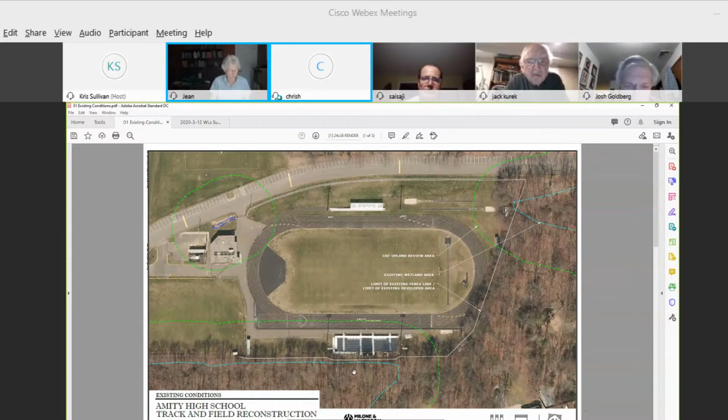The planning for this project has been in the works for the last couple of years. About 6 or 7 months ago, the towns that encompass the school's body — Woodbridge, Bethany, Orange — had a townwide referendum allowing this project to move forward. The main need arises from the existing track and field facilities being on the older side, I believe in the 20 to 30 year range.

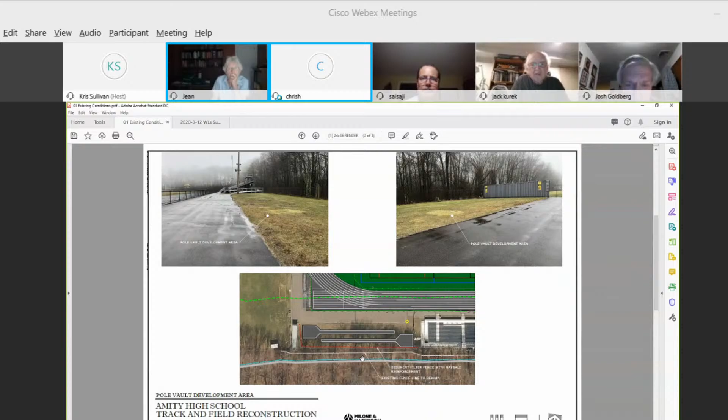They have a very outdated track. The field itself is usually very wet, and once football players get on it, it deteriorates very rapidly and really limits the ability of the site to be used.

Another crucial part for this facility to operate the way the school needs is to maximize the available area within the track itself. That's why we'll be taking the pole vault areas currently located on the eastern side of the field and moving them down to the southwestern portion.

You'll see that there are 2 pole vaults proposed here. It's possible we might only do 1, but in this instance the track coach was looking to get the ability to jump in both directions, since wind going one way or the other affects the jumpers.

The reason we're putting it here and not anywhere else on site is because to the east is all wooded, to the south we can't go because that's off the property and wetlands, to the west is already a field with the concession building, and to the north is too steep and there's a drive aisle there. So this is really the best location we can put this.

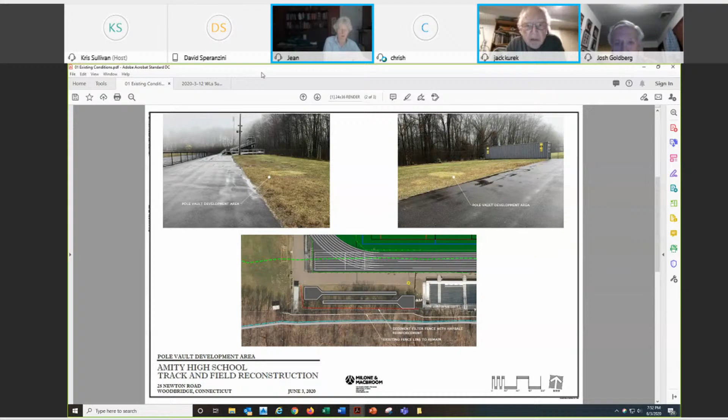Okay, that's passed. And Bob, I'll pass the meeting back to you. Thank you very much. Thanks, everybody.

Okay, we might keep moving along then. Next on the agenda, 57 Park Lane, an application for development of a solar park, a solar farm.

Chris? Yeah, I'm sorry, I think the microphone was cutting in and out. Are you prepared for me to just give a brief presentation on the project? I'm ready to listen, I don't know about everybody else. Yeah, I'm all set. I can see you.

Okay, you can bring something up on a screen if you want. Yeah, I guess let's see. Share content. I apologize, I'm not... Otherwise, everybody has all their plans in front of them, I hope. Nope, I just figured it out here. My Mac made me give a couple permissions here. Can everyone see my screen now? Yes, I think so. Okay, great.

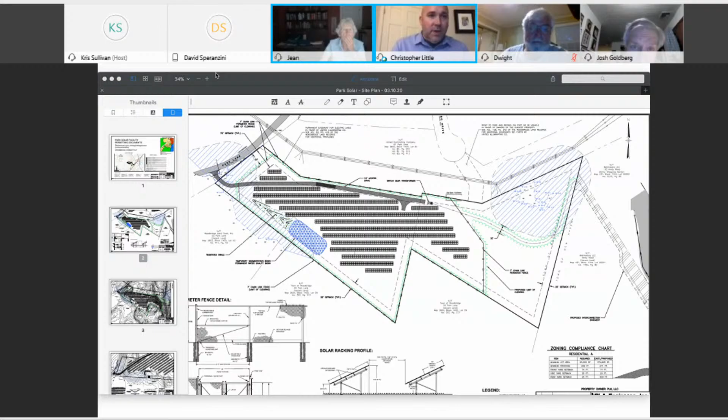This driveway will be constructed out of crushed aggregate. It will not be a bituminous surface, so there actually won't be any asphalt or concrete in the project other than for some of the equipment pads.

In terms of how we're actually going to connect to the grid, we are not proposing to interconnect to United Illuminating's distribution system on Park Lane. We're actually going to be interconnecting further to the east via an underground medium voltage circuit, and you can see that delineated here. It may be difficult to see at the resolution I have, but you might be able to see it better on your plans. It's going to traverse up through the buffer.

This will be trenched and backfilled. Once it's backfilled, there won't be any ongoing impacts. And then it's going to turn downward and interconnect down on the shopping center, the Amity Shopping Center property. The reason for this is the shopping owner property also owns this property in between, and they wanted us to try to stay along the edges of their property rather than bisect it. So I wanted to point out that's the reason for why we're proposing to send this circuit this long.

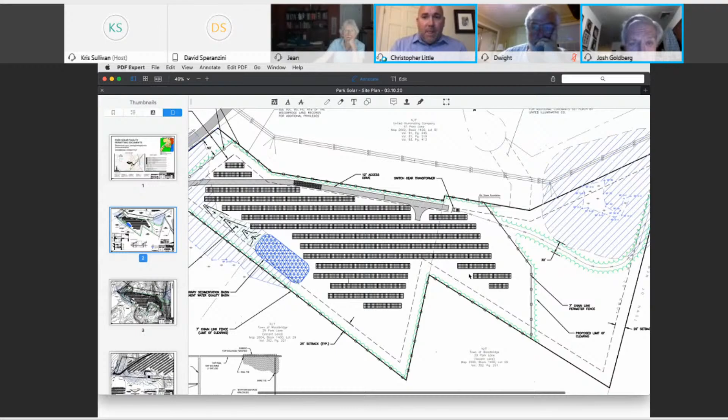Really somewhat unnecessary distance, but it's to appease the property owner so that they will grant us an easement. How much loss, just out of curiosity, do you get running that distance versus the more direct route?

It depends - since this will be an AC circuit, not DC, we can typically avoid massive losses by sizing the cable large enough, but it'll be a big cable. I don't know exactly what the losses will be, but they'd probably be somewhere in the neighborhood of 1% of the facility's generation, is my guess.

A few other details that you can see on the site plan. We will surround the site with a chain link fence. I did note on the engineer's comments that there were some inconsistencies between what we had noted on the plans versus the narrative. It would be a 7-foot chain link fence without any type of rampart on top. Inside the chain link fence, everything would be cleared, and the surface will be maintained with natural vegetation. Any sloped areas will be graded and placed with 4 inches of topsoil, and then either riprap installed or some type of matting to prevent any erosion runoff.

In terms of the wetland impacts, there are no direct wetland impacts. There are a few areas - you can see the blue hashed areas, the 100-foot buffer zone. The area inside that would be the wetlands. There are some minor areas here that we're kind of encroaching into those buffer areas, as well as with the detention basin being proposed, but nothing directly impacting the wetlands. On the east side also, we are proposing to install the underground circuit within a portion of the 100-foot setbacks.

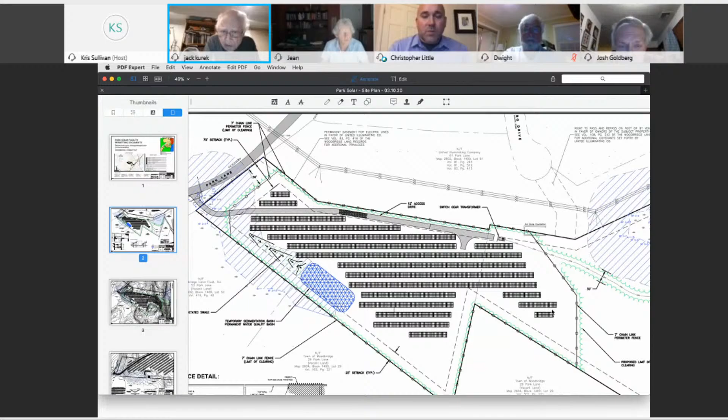I have one question about the retention basin. Is that because of the slope of the land that's where the water is flowing to, or is this in there for some other purpose of drainage?

I'll let Rodney answer that. I know the answer, but I think he'll speak more eloquently to the location of the stormwater basin. That is more or less the low point in the cross slope of the property, but we do need this basin in order to meet the DEP stormwater guidelines. We meet water quality volume with this basin. That's why we need to install this basin.

So is that going to be a depression, or is there going to be a subsurface in there, or plantings, or is it just going to be water when water flows? I missed part of that question, I apologize, could you repeat that? Yeah, is it just going to be a cutout in the ground, just a depression, or is it going to be actually engineered and filled with some sort of crushed rock or other material, or is it going to be planted? How deep is this going to be?

This is strictly a depressed structure. The depth of this is not overly deep - you're talking about 5 to 6 feet at its maximum, but you're only talking about 4 feet of actual storage volume, because it will outlet well before it fills up to the 6 feet.

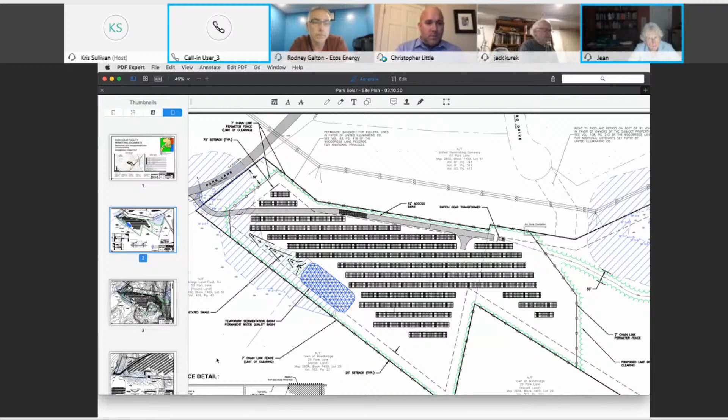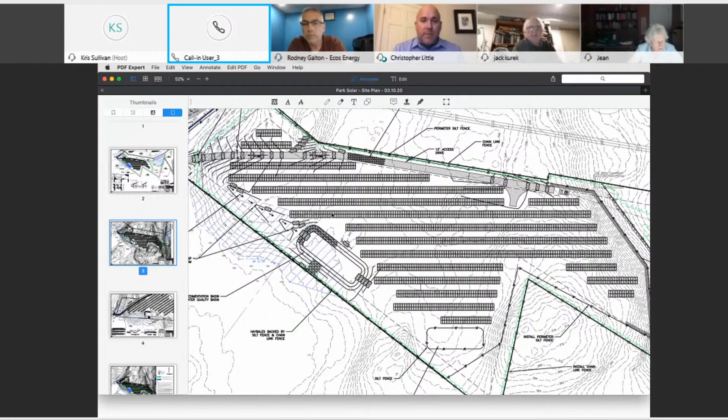I'm looking at sheet 3 of your plan versus this presentation, and it looks like there is an outlet type of flow out of that detention area into the neighboring property. Am I reading that correctly, or is that coming into the detention area from the neighboring property? It looks like based on the contour lines that the area next to that is lower than the detention basin, therefore, is the water going onto the town property, or?

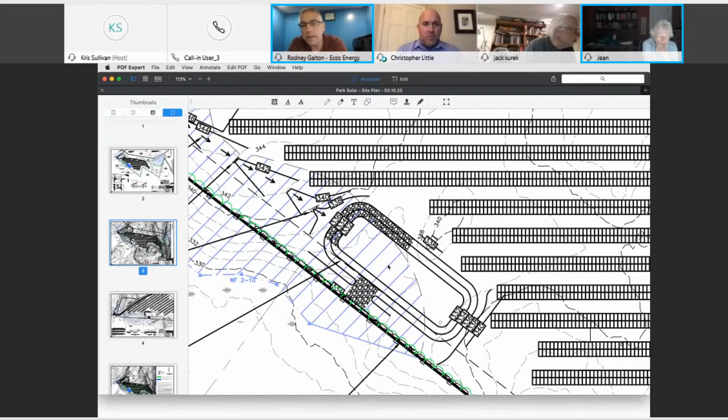The outlet does go towards the property line, but that's exactly where the water currently flows. The water does flow, if you look at the contours to the southwest of the basin, you'll see that they flow right across the property, and that's exactly where they go now, right where that outlet is.

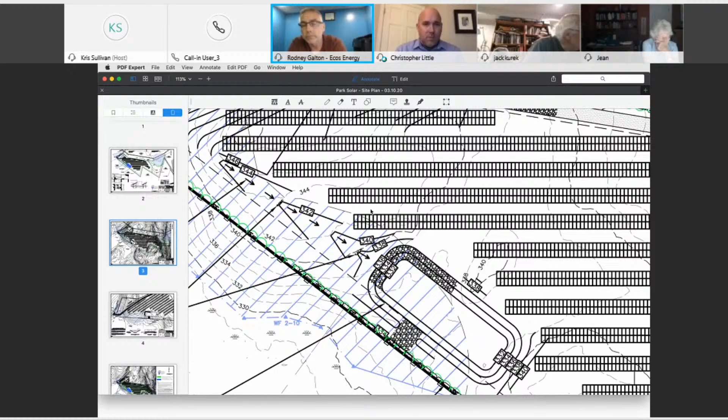Where's the trail in relation to the solar farm? Is it on this side of the property or the other side?

I can speak to that. There is a trail that runs off of Park Lane. Right now, we haven't come up with a solution to relocate that, but right now it runs right through the middle of the array. There are no current rights of record for that trail since this is private property, so we haven't yet determined how we're going to address that.

Okay. I was surprised that the site is as flat as it is. But I see the detention basin is, how is stormwater being managed on the rest of the site, given how large an acreage this array is covering? It seems like, how will the basin function with the rest of the site and prevent neighboring properties from being inundated? Any comments on that?

The basin you see is designed to handle the 5-acre drainage area that is part of the array layout. The basin is sized to handle the 100-year storm event, so this will handle from a 2-year storm to a 100-year storm event. Our peak rates of runoff are lower for the 100-year storm event than they currently are right now.

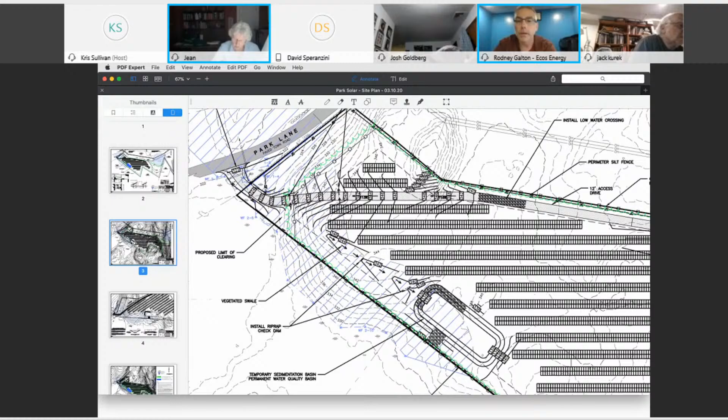Chris, can you pan down to the southeast a little bit, please? Let me zoom up one level too. Yeah, so you can see this area in the southeast drains off the property, and that will continue to drain off the property. We wouldn't be able to change that without massive amounts of earthwork, which we don't like to do for solar projects. Right, I understand that, but if that's treed today and vegetated today, and that all gets cleared, yeah.

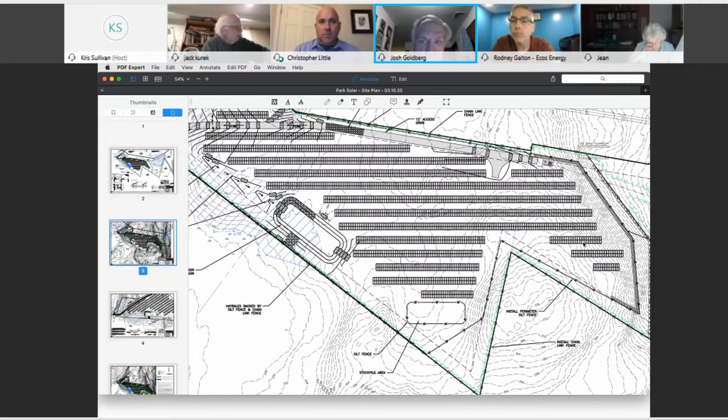Yeah, it drops drastically as you get down toward the shopping center.

Has there been any biological survey done on this piece of land as to what's living there today? There has not. Is there any intent of doing that? There hasn't been any request through the planning process to do that, so at this time we are not proposing to do any.

It looks like the end of the array down there where the transmission line is going to be going. It drops off 20 feet very quickly right at the edge of the array. Isn't that going to create a problem with the runoff from that area? That will not create a problem.

We are putting a wood chip berm and silt fence up along that edge. Once that gets vegetated, there will be no problem at all. And during the construction process, that wood chip berm and silt fence will handle any runoff generated.

Also keep in mind the area where it starts to slope off dramatically, obviously, is an area we avoided intentionally because solar arrays like what we're proposing start to experience significant challenges installing on a slope of this grade. So this area over here, we still own this property, but we're not intending to clear any of these trees. They will actually stay vegetated, and that'll also absorb some of that stormwater runoff in that area.

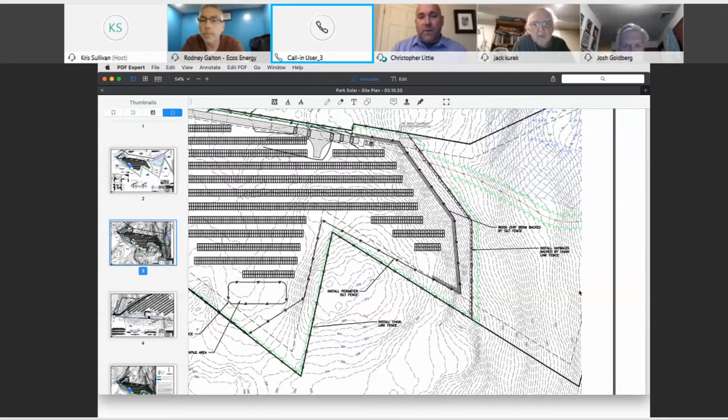Okay, so that fence line is not near your property line then? Is that correct? That's right, no, it extends out further. I think if you look, sheet number 2 is probably a better depiction here.

You can see the green callouts are for the clearing. Obviously we clear a little area in here for the underground circuit, but the rest of this, and this entire area up here where the wetland is, would remain untouched.

That looks like it's probably about 3 acres or so, huh? Yeah, something along those lines. It's about the total acreage, there's actually 2 parcels here, is about a little over 9. And the array itself is right around 5, if I'm not mistaken, Rodney. Yes, that's correct.

So just getting back to that trail issue for a second - the land trust hasn't spoken to you about the relocation? Are you still talking to them, or where does that stand?

Well, this is ultimately a decision that has to come from our upper management. That trail has no easements of record, so it currently traverses through our property without any rights. And since it's private property, our intent is to either dissolve the trail entirely or try to work with the land trust to relocate it somewhere on the property.

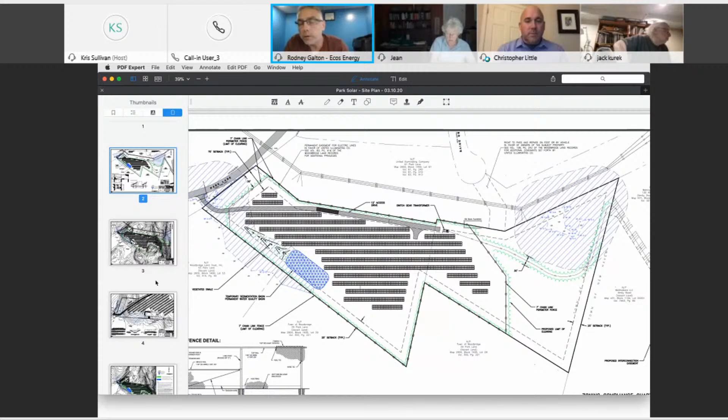And I guess your gravel drive will serve to help control the flow off the north side of the property, so on that side. That's correct. And that gravel drive will also help trap and slow some water, and you might get infiltration along that driveway as well. But we just don't model it that way.

I have one other question. There was a question in the engineer's report about the area where you're trenching the line that carries the current. Is there a need for erosion control along that elbow there that the pipe has to maneuver? Yeah. Yep. Through this area.

Go ahead, Rodney, and you can address that. When the site gets cleared, we will have a lot of wood chips at our disposal, so we will use that as a barrier. We'll put a wood chip berm along the excavation, and what the contractor will do as he's digging, he'll put the excavated material on the high side, and if there's any runoff, it'll just go right back into the trench. So we will be using wood chip berm along the area, especially in the buffer area.

Okay, that was hard to see from the little picture here. Right, okay, thank you. You're welcome.

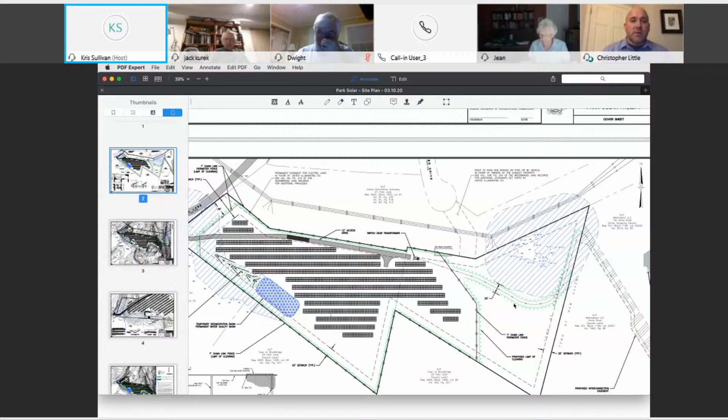Okay, any other comments, questions? No, I'm done. Yeah, I'm good. Jean, anything? No, I think I found all my questions. Thank you. Josh, you all set? I am. Okay, all right.

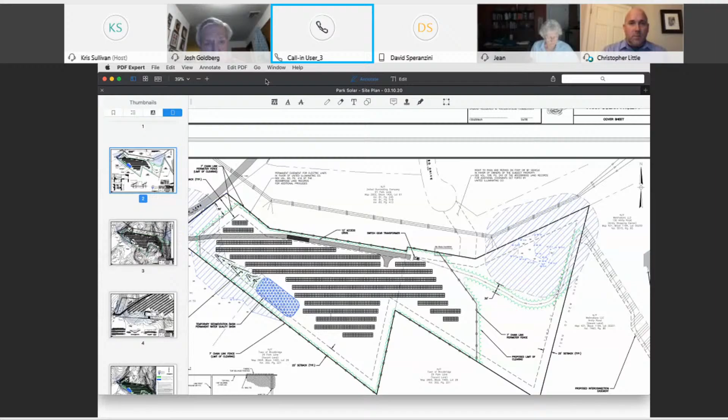I've got to the point where listening and looking, I don't think we really need a site visit. So, but I don't know if anyone else has a different view. I don't think it's necessary. This is Dave. Agreed. Yeah, I'm okay. You're okay, Jack? Yeah, I'm good. Yep. Jean, you okay? Yes, I'm fine. I agree.

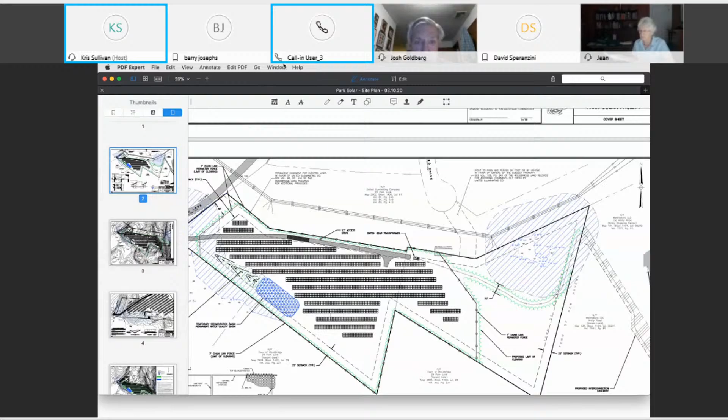Do we want to deal with voting on tonight? Is everybody prepared to deal with that, or what's the pleasure? Yes, by me, I guess it's okay, because I don't know what else we were gonna do. Right, yeah, exactly. We should vote tonight. Okay, all right, then do we have a motion to approve the application as presented?

I guess the only concern I have is, like I mentioned about the trail, but that's probably not something we can control if there's no legal right for it to be there. I would appreciate if you would discuss it with the land trust and see if there's something you could work out.

The plans were fairly complete. Chris, what about a bond? What do you think on that? Was that a question for me or Chris? Oh no, I'm Kris Sullivan. Sorry about that.

We can make it subject to whether or not your consulting engineer recommends it. That's the best way to do it. There's not a whole lot of infrastructure work to be done on it, but it is a big site, so why don't we do that? We'll just make the approval contingent, subject to consulting engineer's determination of whether a bond is necessary, and if so, what the amount is, to be sure the basin work and other protective measures are in place, and that it's all reseeded and planted, and we get growth in there to control the water flow that used to be there.